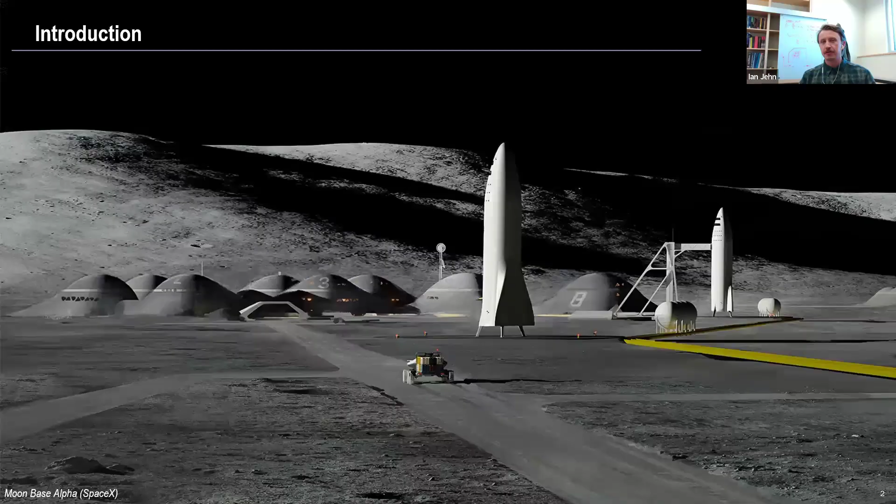Just a quick introduction onto what foundation engineering is, particularly lunar foundation engineering. These slides are going to be a summary of a publication that I put out last year in Acta Astronautica. I have that listed here with a link. Jared's going to share these slides if you guys are interested in reading this publication.

Lunar foundation engineering is a combination of 5 different things. There's some planetary science involved, understanding the geology of the environment, and then a lot of ISRU - how do we build landing pads utilizing resources that we find on the lunar surface, and the lunar surface itself as a resource to support the foundation. Then there's the traditional geotechnical and structural engineering of the foundation approach, engineering the regolith itself below the foundation and then engineering the actual foundation itself.

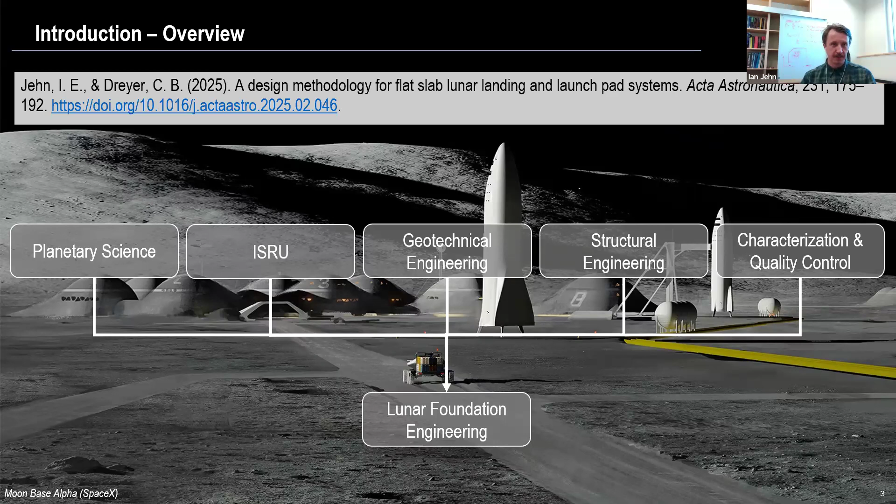And then obviously with all construction projects, there's an aspect of quality control and characterization, just making sure that things are constructed the way that we need them to be in order to perform the way we designed the design intent itself. So I'm going to quickly start off here just with a quick review of lunar regolith itself. I know there's probably a lot of people on this call that are pretty familiar with regolith, specifically lunar regolith, but it is something that requires an understanding so you can understand the behavior.

So the lunar regolith is the moon's surface, consisting of this soil-like dry fragmented granular material. This is what we call regolith. The difference between terrestrial soils and lunar regolith is the irregularly shaped particles.

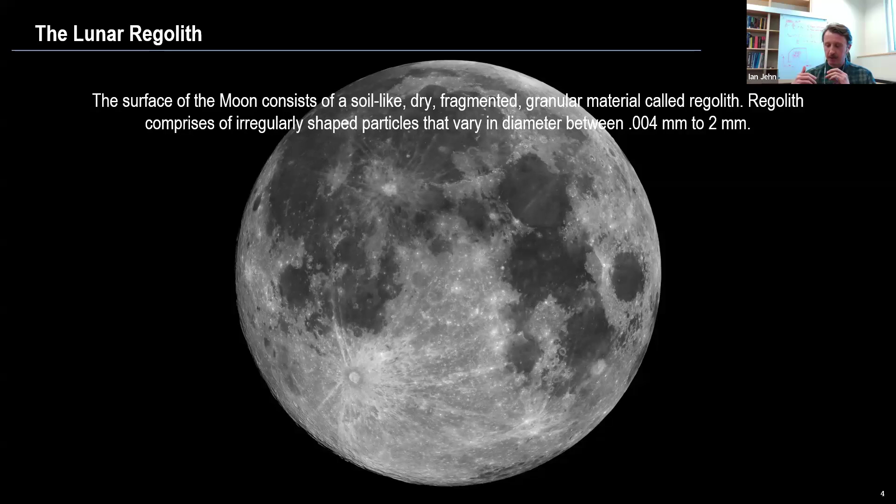The morphology is very different than what we see terrestrially. They also have some variations in diameter, but it does tend to fall within the well-graded sandy silt, the way that we see on Earth.

There's two main areas of the lunar surface that we have characterized different regoliths: the Mare regolith and the Highlands regolith. These basically boil down to both elevation differences and some mineralogical differences. The highland regolith is what I'm going to be focusing on. That's the white areas of the lunar surface. This is where all Artemis missions are currently planned to go, to highlands regions on the South Pole.

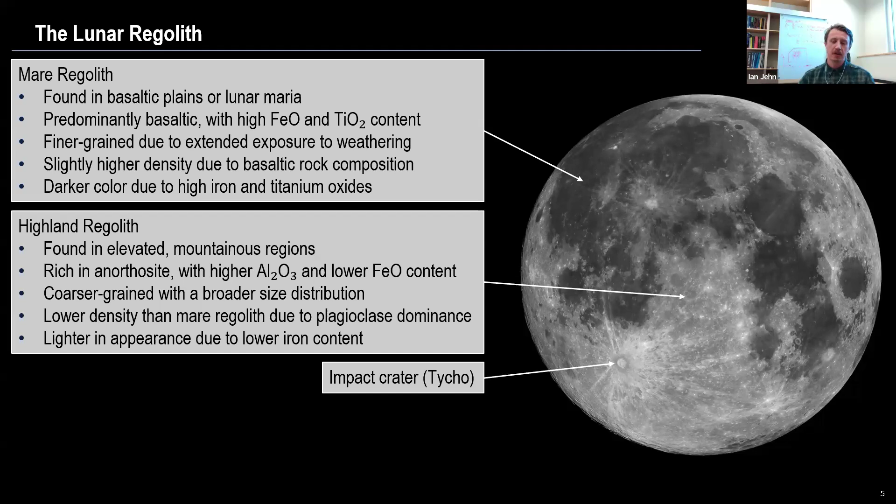But there is some differences between the two regolith classes, so I just wanted to note that. The big part of regolith and why it is so different from terrestrial soils is its formation process.

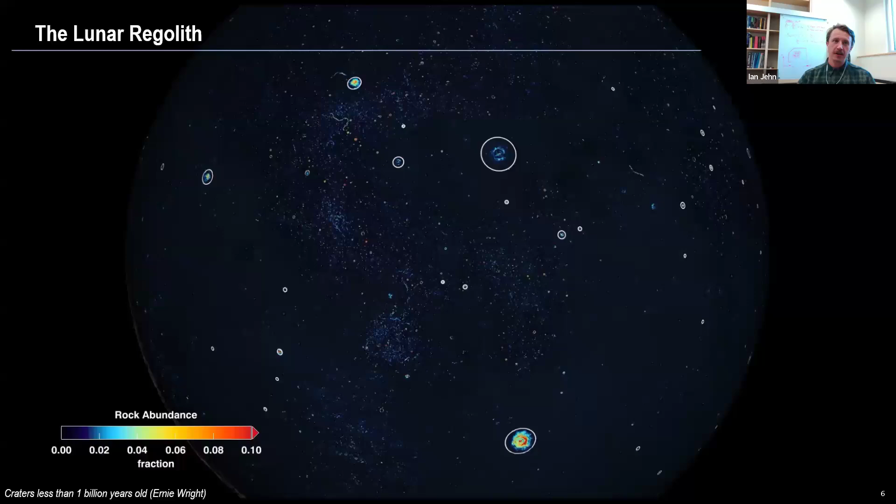This video is just indicating all of the craters on the lunar surface that are less than 1 billion years old, highlighting the level of impacting that occurs on the lunar surface and why this is important for regolith formation itself. The various meteoroids that are impacting the surface create this overturning and mixing process that we call impact gardening.

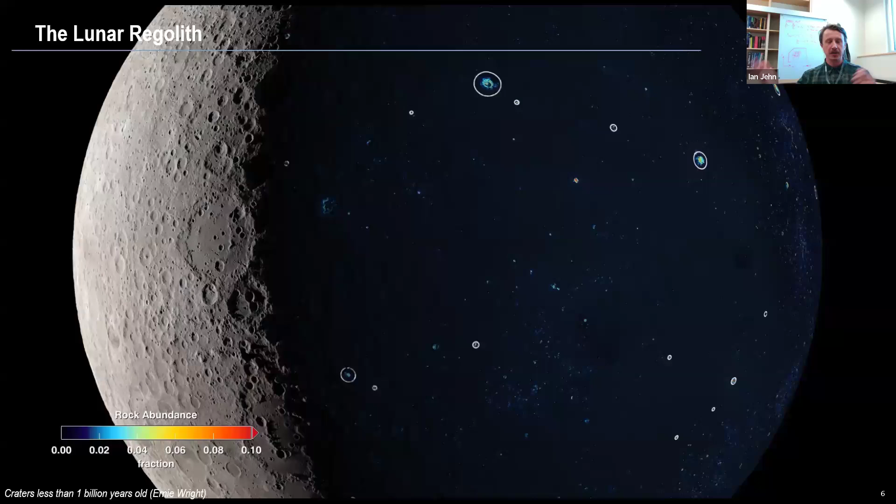And this is why the lunar surface has a little bit more homogeneity than we see from terrestrial soils. When these high velocity impactors hit the surface, they create these ejecta curtains that deposit regolith in the surrounding area of the crater, and this is where this turning comes in. So there's this constant reworking of this surface, and you get this really fine powder on the immediate surface of the moon. If we're going to build anything on that, we need to understand how that regolith is going to perform from a granular mechanics standpoint.

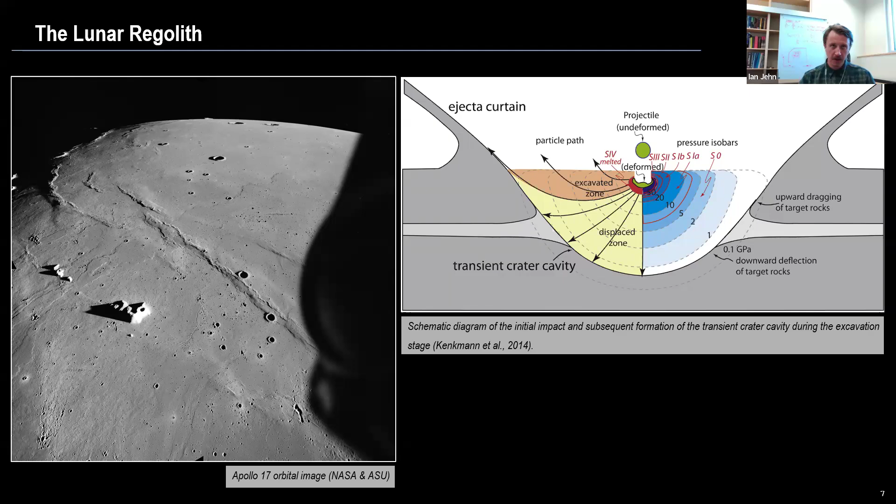This isn't the only mechanism for regolith formation. There's the meteoroid impacts and impact gardening, but there's also space weathering that occurs from exposure to solar and cosmic radiation, and that can alter some mechanical properties. There's also thermal fatigue, the fluctuations between day-night cycles on the lunar surface, which create stress gradients that can fracture particles. And then we have electrostatic charging, where fine regolith particles can acquire a charge and influence particle movement.

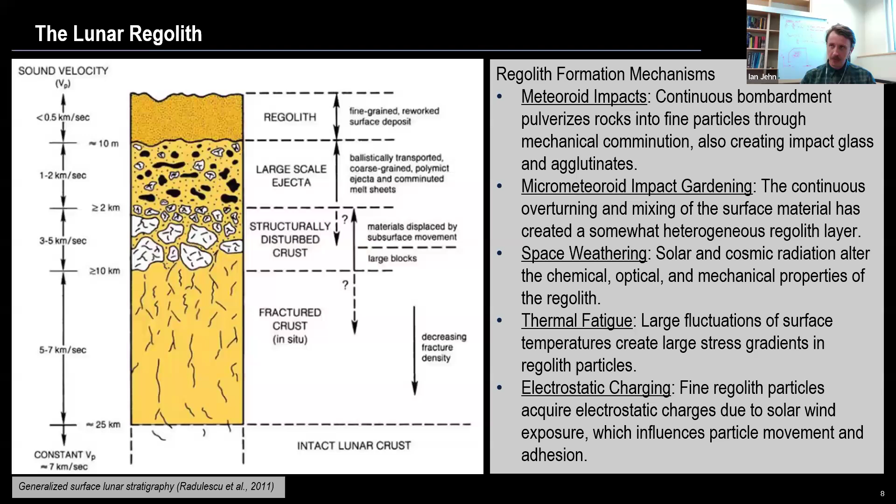Finally, I wanted to show some examples of what these regolith particles look like. Regolith comes in a bunch of different types, but there's just a lot of irregularity. There are some spherical particles - you can see that impact glass sphere. When an impact occurs, there's so much energy in that event that it actually melts some of that material, and as it's being transported across the surface, it turns into a sphere and is deposited that way. But most regolith particles tend to be irregularly shaped with sharp morphologies.

And then the immediate surface that's affected by electrostatic charging and radiation has these fairy castle structures, which are like the immediate surface of the regolith. You get these interesting matrix-type particles that have really small, fine things that can crush really easily.

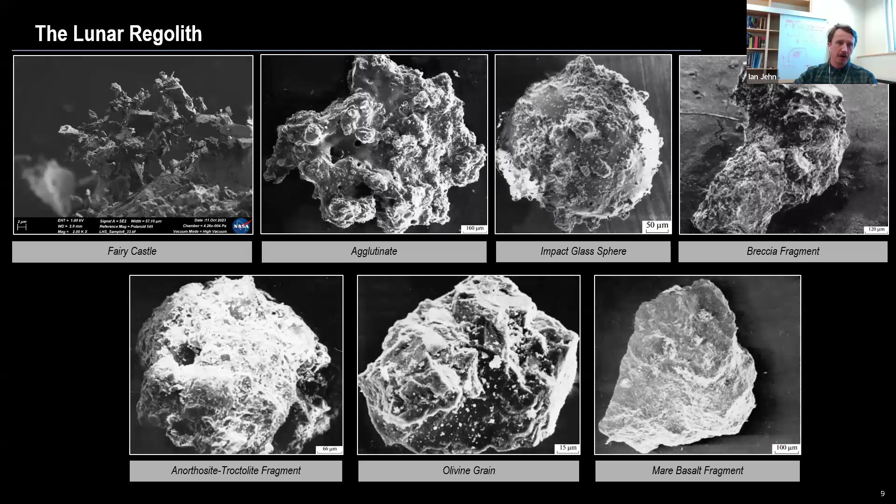So the next important part when it comes to regolith is understanding its density state and how density is related to particle packing and things like that. The top figure shows a difference between a poorly graded and well graded, or in geologic terms, a sorted and poorly sorted granular material. The lunar regolith tends to be well graded, which is the one shown in B here.

The particle size distribution is shown on this figure on the bottom left, which shows the range of particle sizes. This is from the lunar source book, plus or minus 1 standard deviation from Carrier, showing what the Apollo samples taken, specifically for the Highland regolith, look like from a particle size standpoint.

The last thing I wanted to mention on this slide was the in situ natural density profile that has been determined from various missions to the lunar surface. That's this figure on the right with the red dashed line. The big thing I wanted to mention is that the way the regolith forms and is deposited, you quickly get a density profile with high density packing of the regolith particles at a relatively shallow depth.

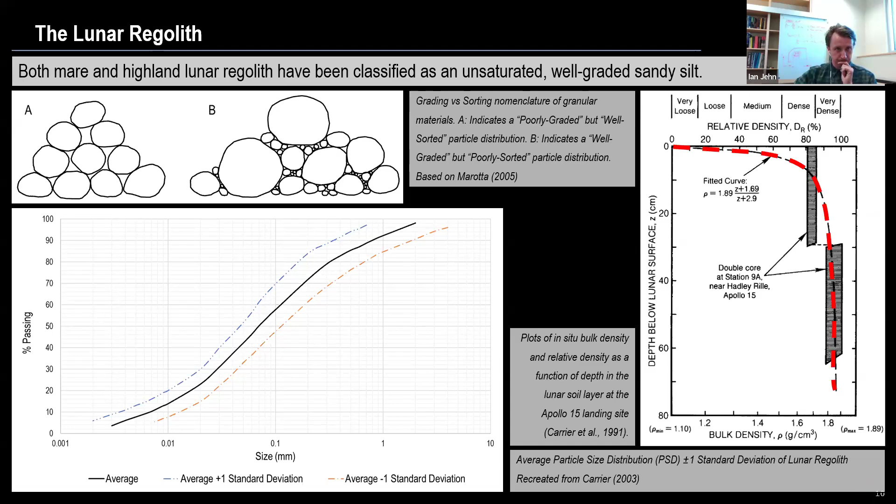To get into the foundation engineering philosophy, we need to talk about the Mohr-Coulomb failure relationship, which is basically a measure of strength, or how much the regolith can support. When it comes to granular material, this is a relationship of shear strength, the shearing of regolith particles against each other. The big part of the Mohr-Coulomb failure relationship is that if you have a denser granular material, you're going to have a stronger strength.

This should be pretty inherent in everyone's mind, but in practice a lot of people don't really see the relationship between density and strength. This is a direct correlation utilizing two major geotechnical parameters: cohesion of the soil and the internal friction angle. That's in this relationship here, where tau is the shear strength of the soil itself.

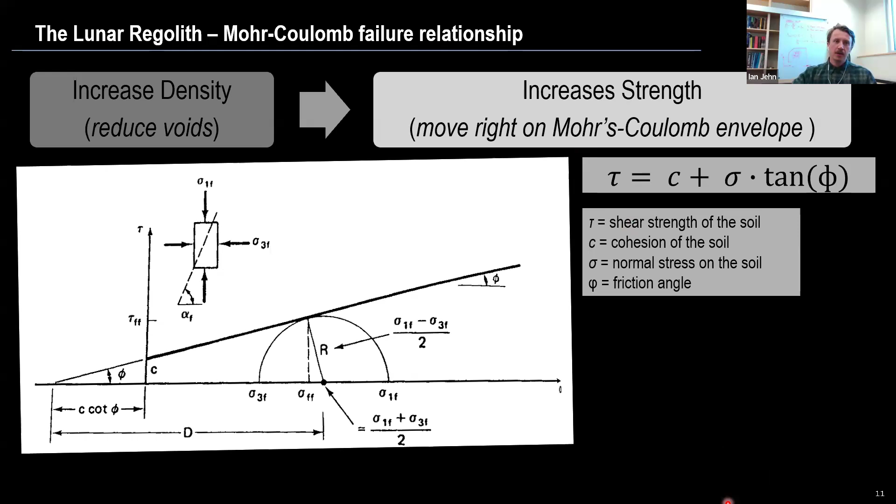This is the idealized version of the Mohr-Coulomb failure relationship, but if you were to take a bunch of triaxial tests to determine those geotechnical values, you'd actually see that the Mohr-Coulomb failure envelope is curved in nature. Basically, there's a relationship where you can only get so much strength with so much density. So the linear Mohr-Coulomb failure relationship is the typical model we use, but in practice you'll see this curvature and a change in internal friction angle with density.

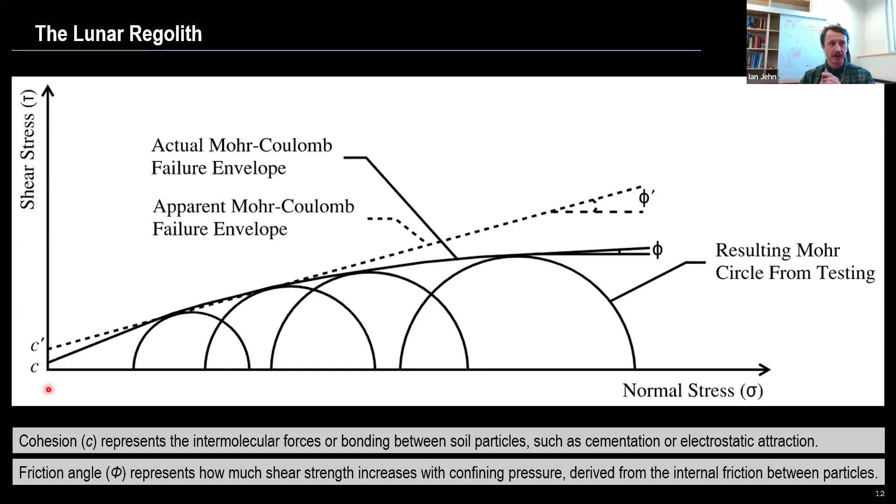The cohesion is just the intercept on the shear stress axis, and that will also be related to that actual curvature. A really good example of this, and Jared was actually a co-author on this publication showing that this density change correlates to shear strength, is this figure right here - the cohesion and shear strength of compacted lunar and Martian regolith simulants. The big thing is as you increase density on this axis, you get an increase in strength, and if you alter that normal stress at all, you'll get a bit of difference in that strength. But ultimately, higher density, higher shear strength.

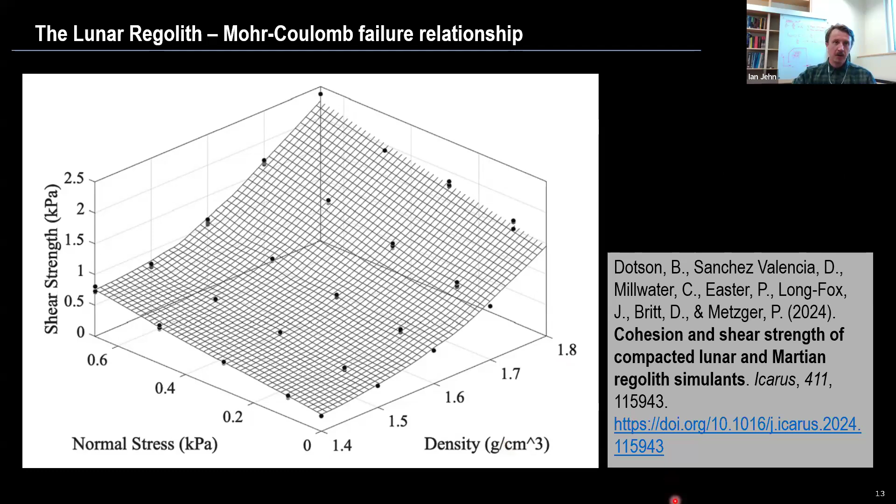Before we get into the foundation approach, I wanted to quickly summarize a few different geotechnical properties for both the Mare and Highland regions of the regolith. What I have here is a summary of these values from known science missions to the lunar surface, including the Apollo missions but also some of the newer missions that have gone to the Highlands regions. I've listed the minimum and maximum densities, and then the cohesion and friction angle.

I also wanted to include something called the compression index, which basically quantifies the deformability of a soil when it's subjected to an increased effective vertical stress. This is a measure of deformability, important for foundations, as you'll see in the next slide. Also, to further define cohesion and friction angle: cohesion is the intermolecular forces between the soil particles, and friction angle represents the actual shear friction interaction between the particles.

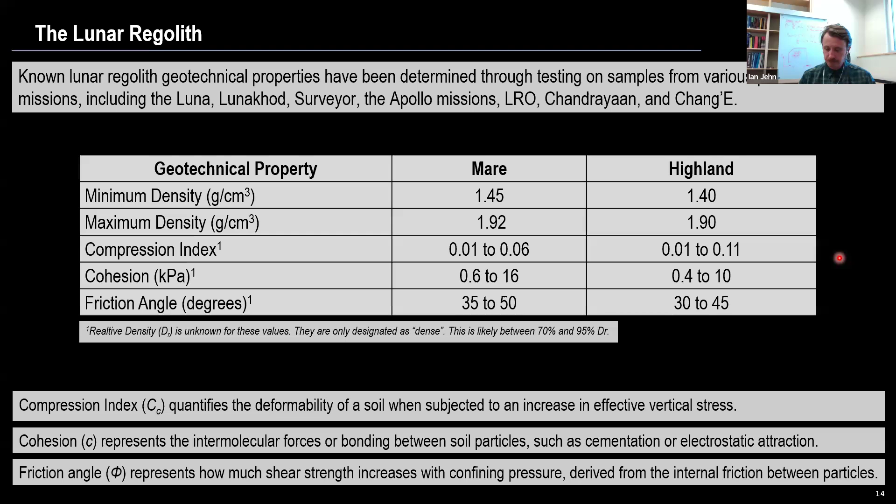Okay, now that we've covered the regolith, let's talk about foundations. Before we go further, I want to define what a foundation is. I don't know how many civils are on this call—I'm going to assume it's none, because that tends to be my experience in the space industry. I'm the only civil out here screaming about regolith and why it's important. So we're going to start with: what is a foundation?

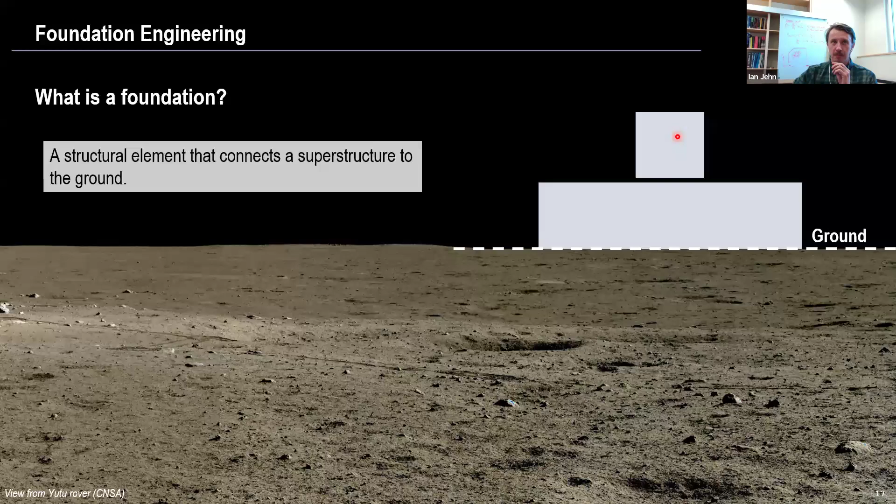The definition of a foundation is a structural element that connects a superstructure to the ground. I've drawn an idealized version of this: the superstructure is the top component, and this is the foundation itself. The purpose of a foundation is to distribute any loads applied to the superstructure over a larger area of the foundation, to reduce both the deformation and pressure resulting on the ground.

So if you have applied vertical and horizontal loads on the superstructure, that transfers down into the foundation, and you get a resulting ground pressure in this trapezoidal shape. Then we have this delta here, which is the actual deformation down into the surface. Depending on what system this foundation is supporting, you need to understand that deformation so your system can account for that vertical movement downward. And the resulting ground pressure relates to things like bearing capacity, which is completely related to the shear strength of the regolith itself.

There's one more component of foundations: preventing lateral movements of the superstructure. This can be done through overturning resistance or anchoring. Not something I'll talk about too much here, but lateral forces on the moon exist—seismic activity exists. I think we've already heard from Dr. Nirma Kaluk about this; she's my co-investigator on all our seismic work. So it's important to think about lateral forces, but for this example, we're only focusing on forces induced from a rocket landing on the surface.

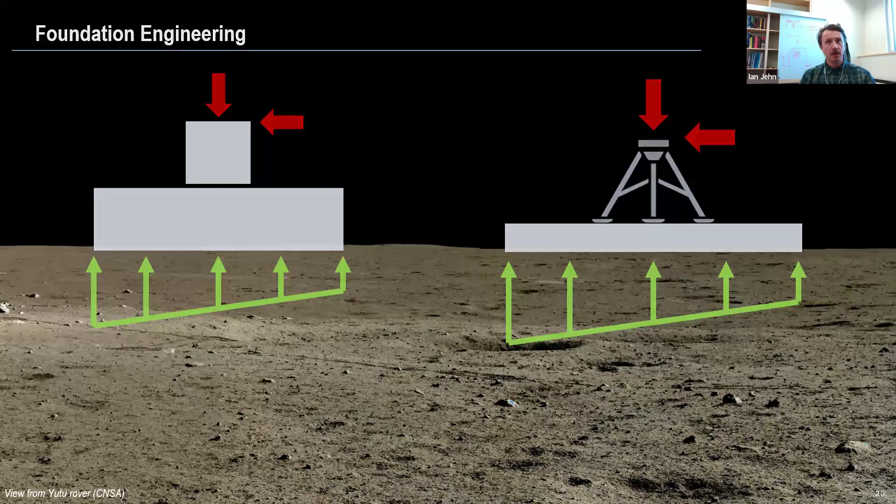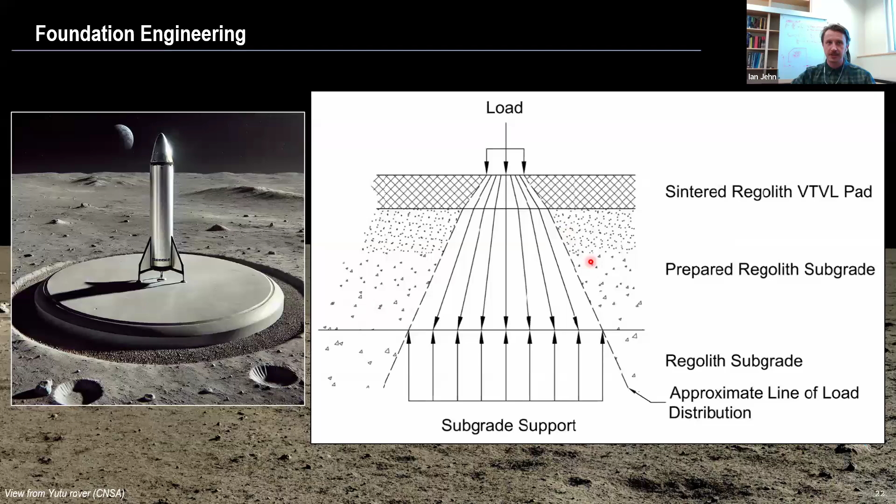Just to idealize what this means—actually I have two slides mixed up here, let me go to this next one first. If we idealize a landing pad foundation, we have a rocket sitting on a large flat concrete slab, or sintered regolith as I'm calling it in this figure. It's an engineered surface that transfers vertical loads through the surface, down into some prepared regolith subgrade. We'll talk about that preparation as part of the foundation engineering approach, which transfers all those forces down into the regolith subgrade below.

Going back to the slide I mixed up: if we model the flat slab of a lunar landing pad, we have a foundation here with an applied load, and we can model the subgrade below as a granular material with a stiffness. Stiffness is your applied force divided by the resulting displacement. You can model the regolith as a series of springs that compress as you apply load, and that compression is basically a rearrangement of the various particles.

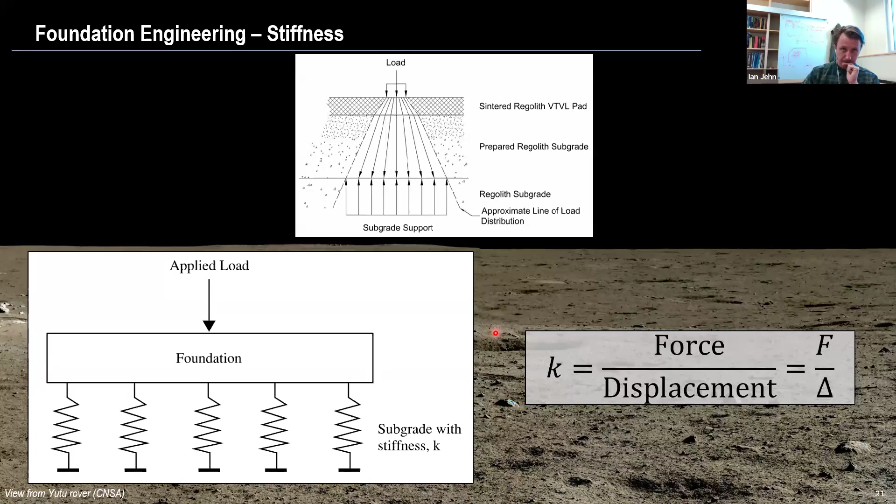Sorry for the mix-up on the slides, but let's start with the displacement component of this stiffness equation. When it comes to displacement of a granular material—in terrestrial geotechnical engineering we call this settlement—it's basically the rearrangement and densification of particles.

There are three main components of settlement that need to be incorporated for traditional foundation engineering. The first is shown in green: permanent deformation, or plastic deformation, particle crushing or distortion. Especially with that fairy castle structure on the immediate surface, this is the crushing of those particles and filling the voids created between them. This is plastic deformation, and agglutinates are actually a good component of this as well, since they can fracture these weaker particles.

The bigger component of settlement is shown in blue: consolidation settlement. This is the actual rearrangement and densification of particles. Utilizing traditional soil mechanics approaches, this can be modeled with an equation: the total change in void ratio caused by the applied load, divided by 1 plus the original void ratio. I'll show in a few slides how you quantify void ratio, but that's where the compressibility index comes in.

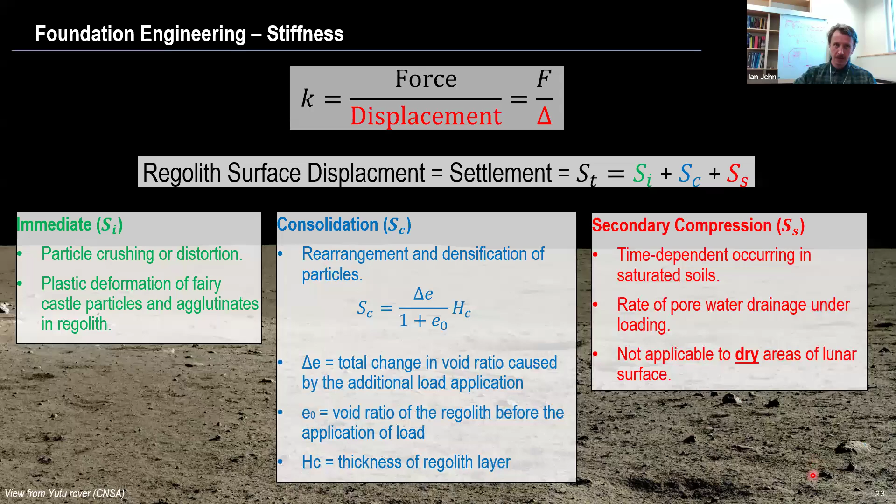Moving on to the force component of that stiffness equation: bearing capacity failure. This is generally listed as three different types of shear failure. The one listed in green is what we'd typically see in high density soils. When applying a vertical force down, you get failure wedges where the soil pushes outward and upward, creating bulges on each side of the vertical component. This is the type of failure we want to see in foundations—a high strength failure.

But if you get down into yellow, this is considered local shear failure, where you start having much more jagged failure on the load versus settlement plot. These tend to show yielding closer to the edges of the footing, and are often accompanied by quick jerking movements as you apply that load.

Finally, in red, we have low density failure, called punching shear failure. This is considerable vertical settlement that occurs immediately as you apply the load. This is what we see in the Apollo boot print photos—the Apollo lander foot pads as they touch down to the ground, with large deformations occurring very quickly because of that low density immediate surface.

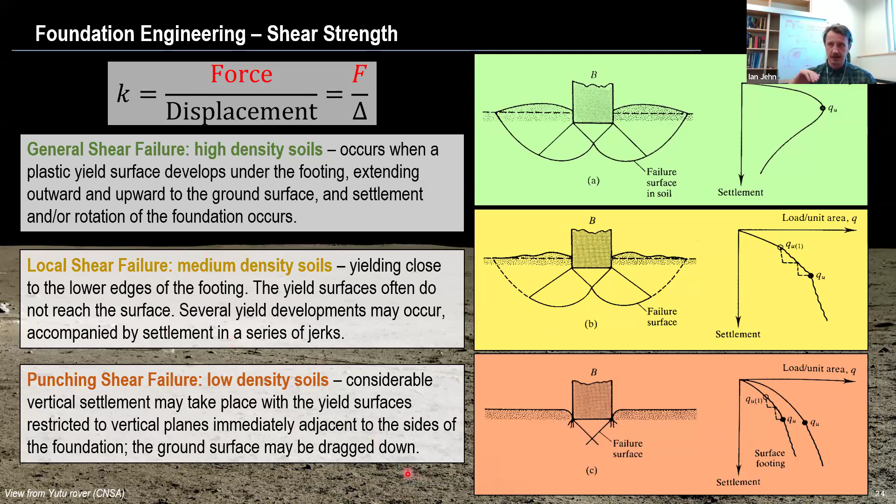This ultimately goes into ultimate bearing capacity. This is a bearing capacity plot people are probably familiar with from the Lunar Sourcebook. I'm not going to talk about bearing capacity much because settlement tends to be the bigger issue for lunar foundation engineering. The only reason I include it is that the bearing capacity of regolith is very high on the lunar surface because of that formation mechanism, giving very high density regolith at very shallow distances from the surface. We're not going to build anything that exceeds bearing capacity anytime soon, though it's something to consider eventually—once we get our first high rise on the South Pole, bearing capacity will matter a lot. But immediately we just need to focus on maintaining and mitigating surface settlement and deformation.

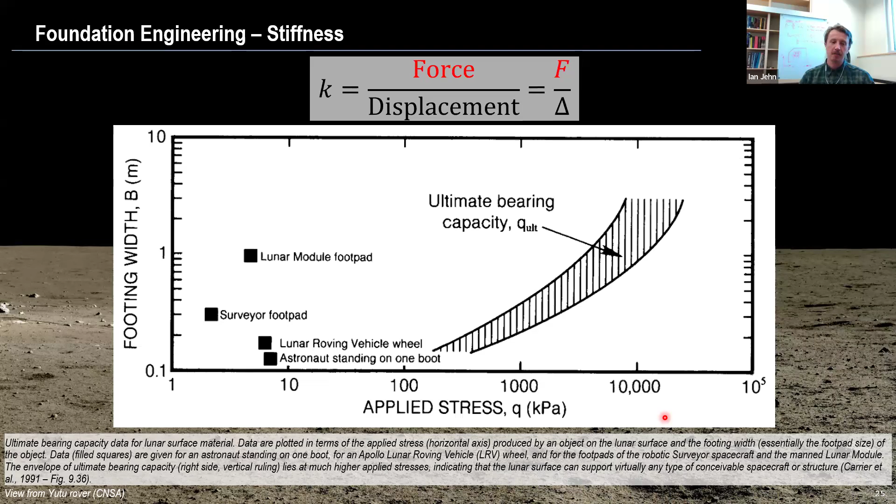To summarize the foundation engineering approach: if we design a lunar landing pad foundation on the South Pole of the Moon, we need to think about two things—reducing surface deformation and reducing the applied pressure on the surface. But applied pressure is not as much of a problem as reducing surface deformation. To reduce surface deformation, we can use two approaches. One is to densify the immediate surface to a higher density state, so we won't see rearrangement and consolidation of the regolith below when we apply the foundation and its loading.

Or we can simply excavate down to that natural high density subgrade, which was shown in that density plot. Getting down to 20 centimeters will get us considerably more dense regolith, requiring much less actual surface preparation before we construct the foundation on top of it. If we needed to reduce the applied pressure on the surface, you can do that by engineering your foundation a little bit better. This is either by reducing the applied loading, which can't necessarily occur all the time, but you can increase the loaded area onto that surface by increasing the foundation size, making it wider, thicker, things like that. So that would be the structural engineering approach to reducing that applied pressure.

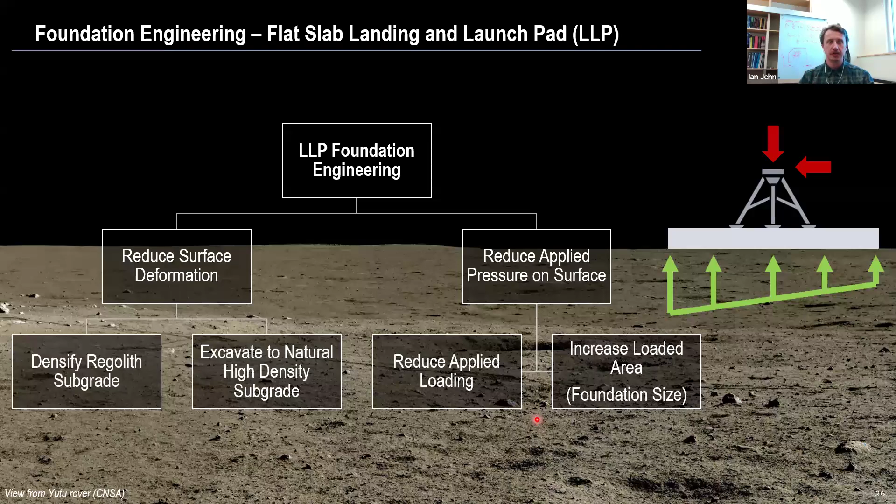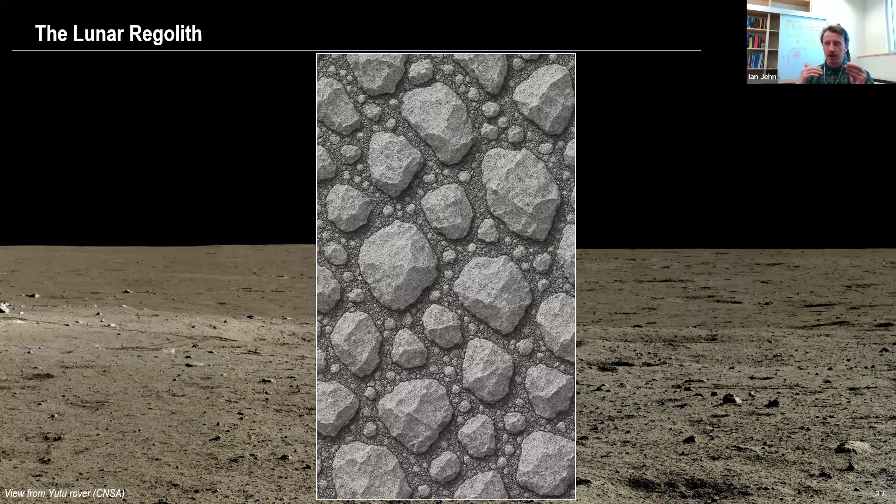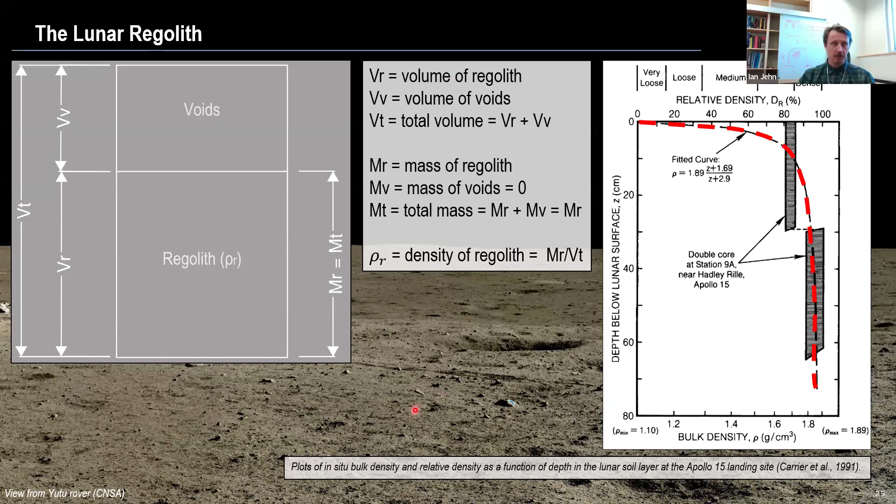So if we were to take a scoop of lunar regolith and look at it from a pure material standpoint, you can make something called a phase diagram. This is simply grouping all the solids and then all the voids. If you take a scoop of regolith, you can quantify how much actual solid mass is there and the voids between them, using this phase diagram. This is where you get the volume of voids to volume of solids, which is that void ratio I mentioned earlier. This is how you quantify the actual density state. The reason I'm bringing up phase diagrams is just to show you this single slide so you can see a visual representation of what this means.

You're going to see in this presentation that I'm going to tell you that's something we need to think about and not directly compare to the lunar surface, because lunar regolith does not behave the same way that a saturated soil on Earth supporting that same foundation would behave.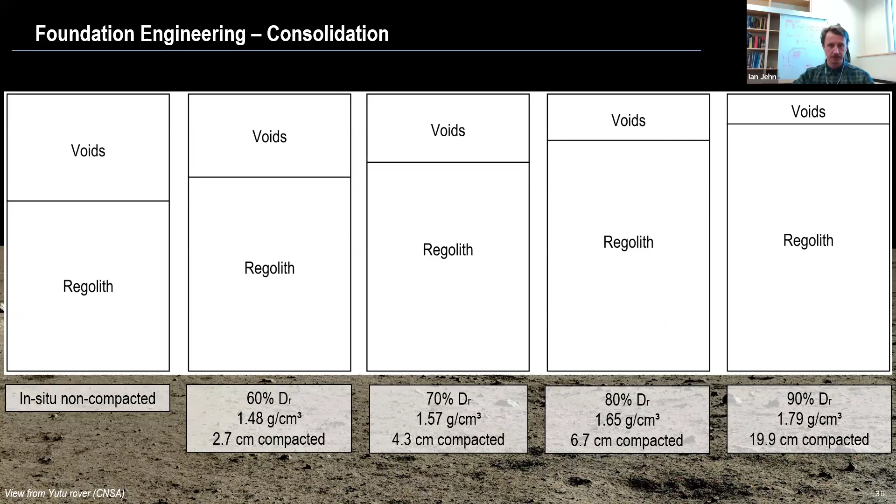So I think we're all familiar with how SpaceX has been doing things, landing vertically. This is how Artemis 3 is going to land, and all the preceding Artemis missions. But we have the plume environment created because the rocket nozzle is oriented at the bottom of this landing vehicle, and that high plume environment can create what is called plume surface interaction.

These are high velocity and high heat plumes interacting with that regolith, and that regolith is very low density, so you can create high velocity ejecta regolith particles that can reach ballistic trajectories and travel long distances in vacuum. This is obviously a very dusty and dangerous environment.

If you're landing anywhere near other mission assets, you're going to have these regolith ejecta, and it's going to be a big issue. So we want to mitigate this plume surface interaction utilizing a landing pad surface. This landing pad is going to create stability for the landing zone, and also create that load transfer down into the regolith surface to support the lander so that it lands perfectly vertical, with no overturning or tipping issues.

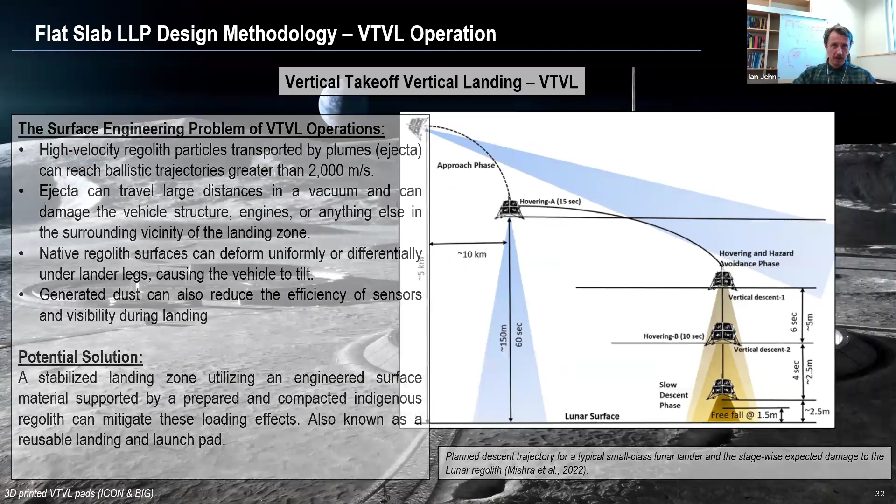We had a pretty good example of this regolith ejecta from Firefly last year, where you can see this huge dust environment occurring, and you can actually see there was a pretty good size regolith rock that was ejected out as it landed, but you get this pretty intense dusty environment.

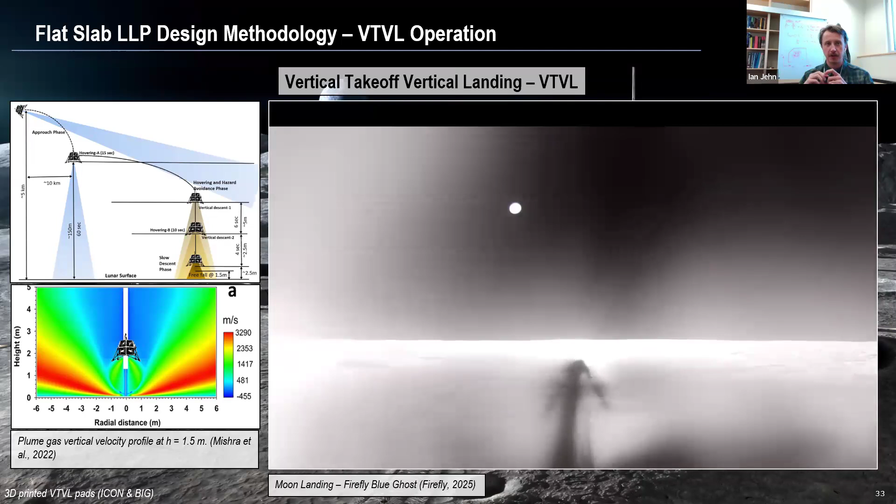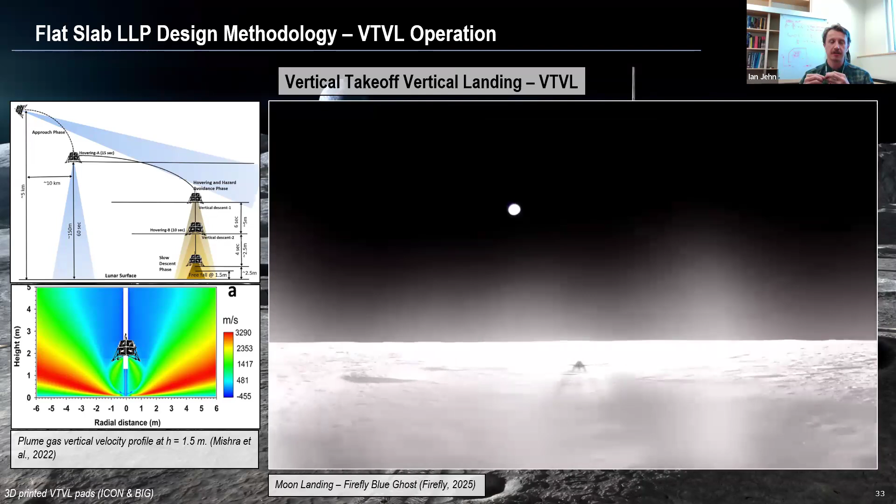This is a very lightweight lander compared to what we're talking about with HLS vehicles. So it's something we really need to consider for HLS, because interacting with the surface at much higher velocity, higher pressure, and higher heat flux from these HLS landers is going to make this problem exceedingly worse.

We have pretty good examples from SpaceX, this is the Falcon Heavy boosters landing on a concrete landing pad terrestrially. You can see the amount of debris occurring. This is from Everyday Astronaut's film, they had a camera set up during that landing back in 2018. You have a lot of debris blowing around, and when you don't have an actual atmosphere to interact with, this is going to create the same problem.

The big thing when it comes to the plume environment is how much pressure and heat flux is generated. This figure on the top right is a CFD model showing a rocket nozzle and the resulting pressure out of that nozzle, and the interaction at the horizontal surface below, for an 11-ton lander and a 40-ton lander. You can see the large increase in the pressure topography here.

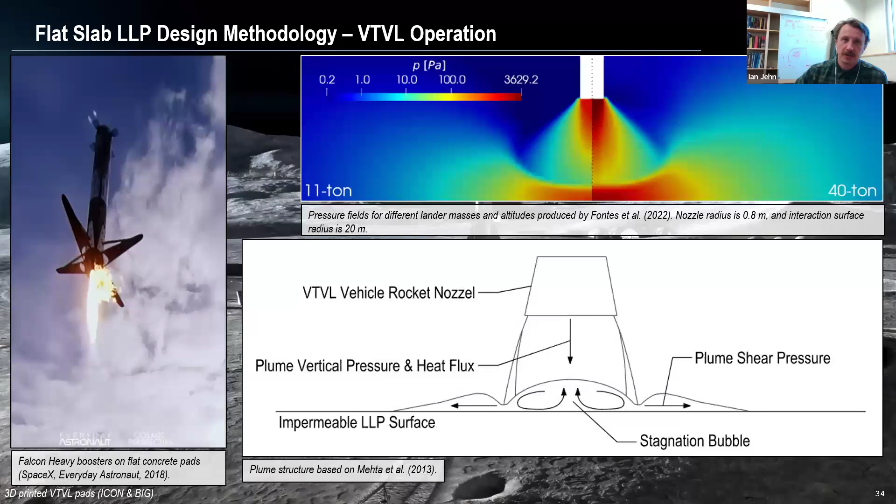This concentrated pressure occurs because of something called the stagnation bubble. When you have this vertical rocket nozzle blowing pressure and heat flux down, you can create these almost eddying type effects where you have a concentration of pressure and heat flux, plus the component of vertical pressure and plume shear pressure on each side.

In the publication I mentioned at the beginning, which is where most of this work comes from, I go through the process of simplifying these loading values, specifically pressure and heat flux from a chemical rocket propulsion system. The reason I'm doing this is because every rocket manufacturer does not want to share data from their rocket or rocket nozzle itself, it's an extremely proprietary area, so they don't want to share estimated pressures or heat flux.

So I proposed this very simplified estimate, and I want to reinforce that I'm not claiming these values are exactly one-to-one. There's so much variability in this. These are only used for approximations, so that we can design a landing pad.

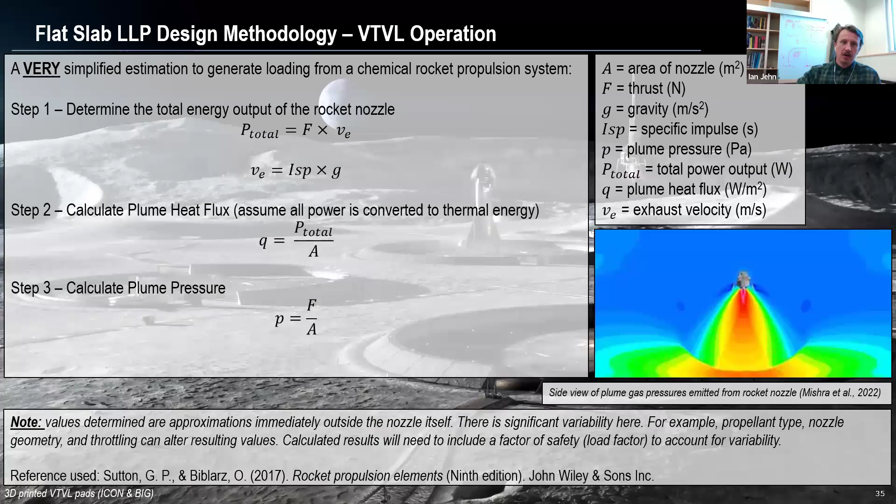To simplify this into 3 simple steps, and if you're curious how I did this, please refer to my publication: you determine the total energy output from the rocket nozzle, and from that you calculate the plume heat flux and plume pressure immediately outside that nozzle. Then, due to that stagnation bubble, the order of magnitude of that pressure and heat flux immediately outside the nozzle tends to be the same at the maximum point that the nozzle is interacting with the horizontal surface. From there, I'm utilizing something called a bullseye landing loading geometry.

So I propose this bullseye loading to basically simplify that loading and make sure we're accounting for any type of variability. The maximum plume pressure and heat flux is in the center, and then that dissipates as you move outwards from the centroid of the plume itself.

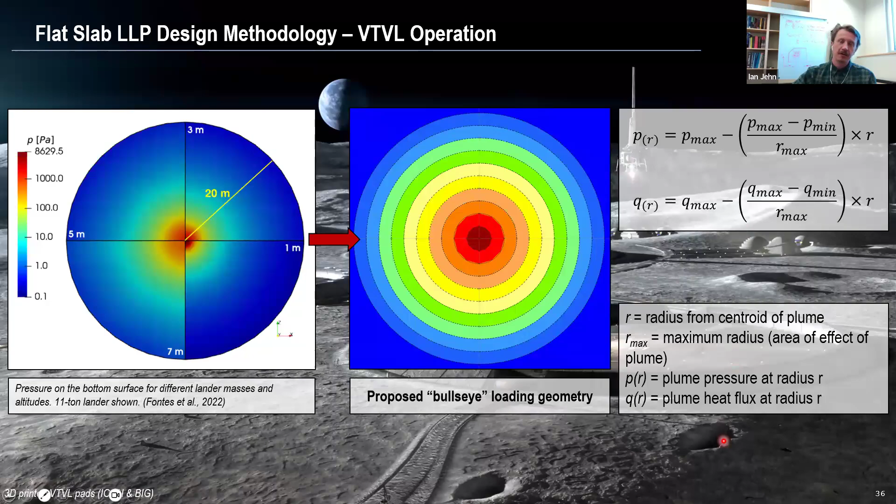Again, a few ways of quantifying that here, more in the publication if you care to learn about it. But the bigger thing here is estimating the maximum plume pressure and heat flux for our landing pad design utilizing different vehicle classes, based on vehicle mass and the resulting rocket engines used for each of these masses.

These values are, for anyone familiar with the American Society of Civil Engineers, part of a lunar construction guidelines document we're putting together. We'll be talking about it more at this year's Earth and Space conference in April. These estimated plume pressures and heat flux values will be a chapter in that document so the industry can utilize an approximated approach for landing pad design.

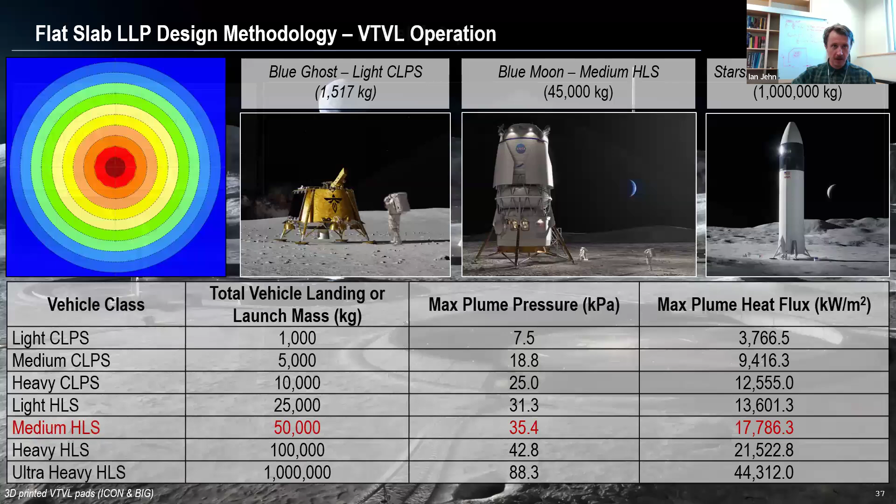So in order to design the landing pad itself, I utilized a finite element analysis here, kind of a traditional structural engineering approach, just as an example in this publication. I'm utilizing the 50,000 kilogram HLS lander, which I listed as a medium HLS.

We're assuming a monolithic sintered regolith pad of about 40 meters in diameter. This gray element is the actual landing pad itself, and that is supported on about 3 meters of compacted regolith subgrade, which is regolith compacted and densified past that in situ state.

I specifically picked 3 density states that I'll show here in a minute. What I have shown here is 90% relative density, but I'll go into that in a second. I just wanted to show my meshing approach, how I modeled the 2 different elements, the regolith in green and the pad in gray.

You can see there's a concentration of mesh in the center there, which is to account for that high plume surface interaction with that pressure and heat flux, making sure the model is distributing those stresses correctly.

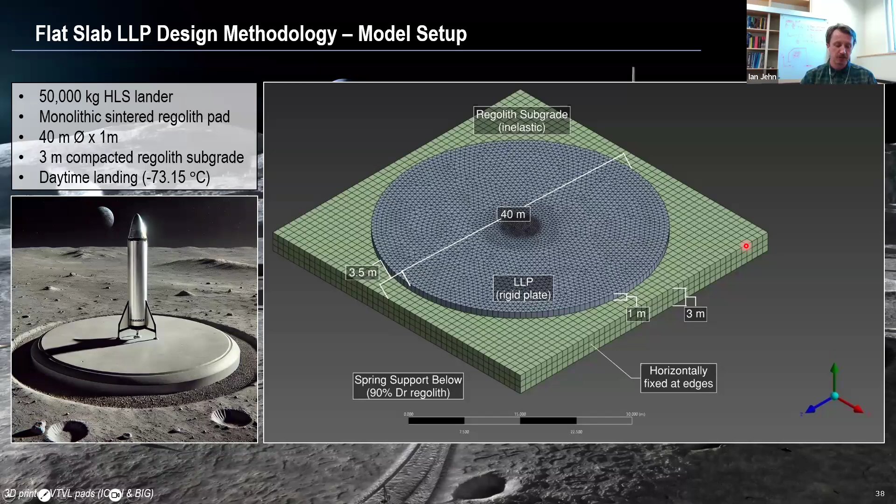So we have the lander coming down. What I'm presenting here is just the landing event. The launch event will obviously have different environments, since the rocket nozzle is actually going to be closer to the surface with that interaction.

The bigger reason I'm showing landing here is because it's typical in vertical takeoff, vertical landing operations that as that lander comes down, there's an engine cutoff at some point, and then that lander free falls the rest of the way and impacts the surface.

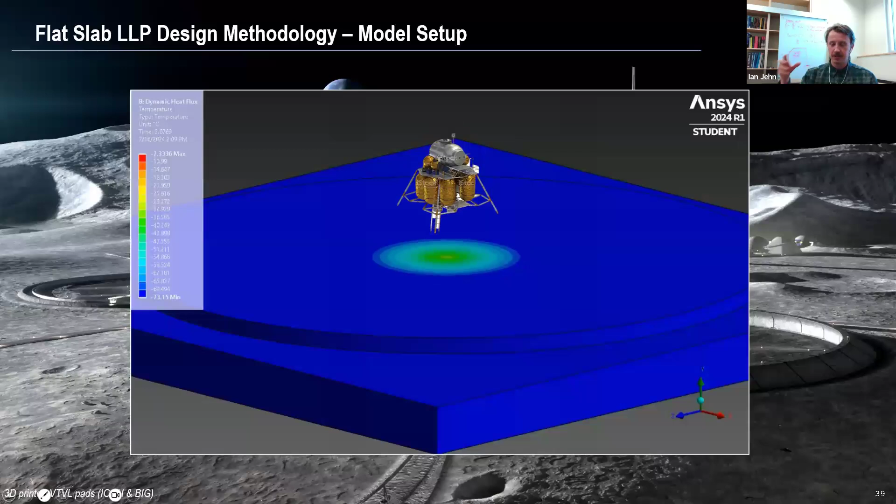So I wanted to account for the impacting event of everything centered on one leg, so that we can see what that does from a structural engineering standpoint of the landing pad itself.

So we're going to go into the loading conditions real quick. I generated this based on my bullseye approach - a loading point plot that I used for both the plume pressure on the left here and heat flux on the right, just showing that distribution from the center.

That was then imported into ANSYS to create the actual loading geometry. You can see the maximum values I used here for both pressure and heat flux.

I utilized a time step approach where I assumed the landing event occurred over 4 seconds. As you can see, for example on the vertical pressure, the pressure increases up to that maximum pressure at 4 seconds, and then we have an engine cutoff at 5 seconds.

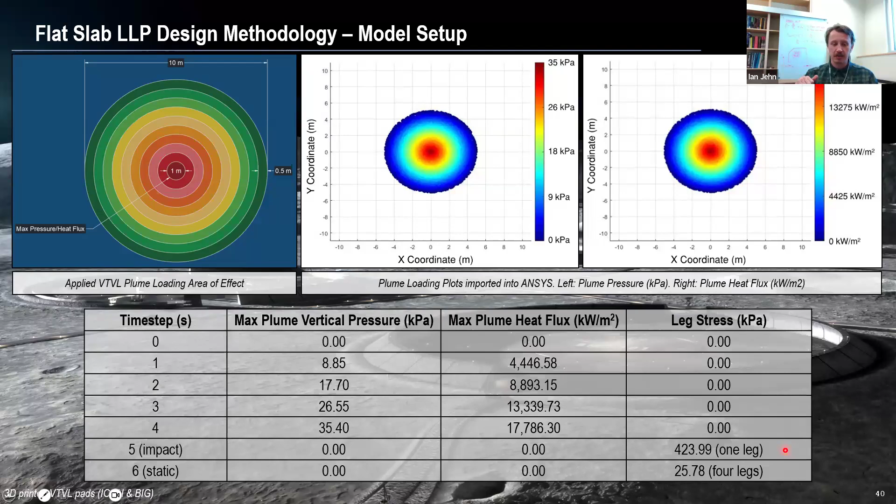So I'm assuming the impacting event from one leg occurs at 5 seconds, and that's where you get this 423 kilopascals of one leg hitting that surface. After that impact occurs, we have the lander statically bearing on that surface.

The identified failure modes listed in that publication, I'll quickly review here. When it comes to the landing pad itself, we need to consider three main structural failure modes: axial, shear, and bending failure. Axial failure is physical crushing of the pad. Shear failure would be an actual punching failure of the lander leg hitting the surface, punching out this trapezoidal wedge. Then there's bending failure, where you have compression and tension couples in a flat slab, so you get bending in the slab.

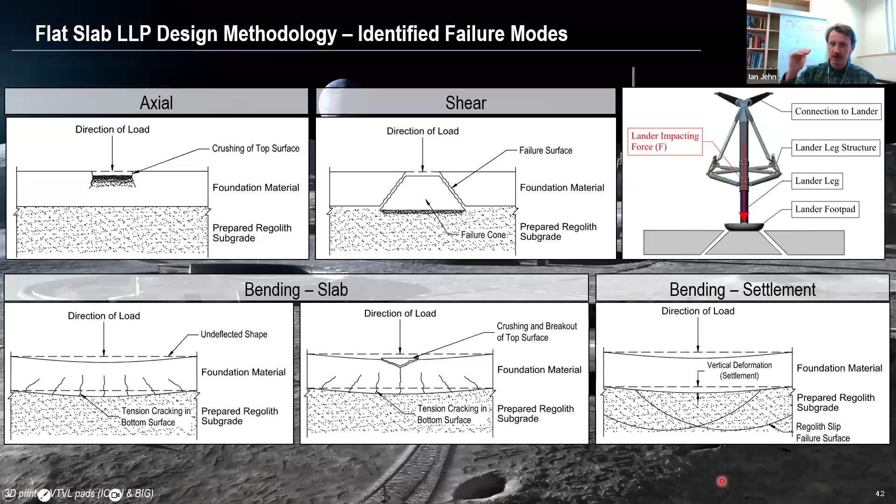So if you have more deformation of the subgrade below, you're going to have more bending of the pad.

There are also some surface failures we need to consider. This is more of a serviceability or maintenance thing for landing pads. The Morpheus lander showed some pretty good examples of this - you can have cracking or chipping of the top surface, or because of the high temperature environment from heat flux, you can get delamination and eventually spallation of the immediate surface where you have large stress differentials, and then surface erosion or ablation from that spallation.

So that's just actually removing this material, and this was from the Morpheus landing. After 10 landing attempts, you can see that the concrete spalled and eroded off pretty good. And these circles are actually chipping marks from the lander legs itself.

If you do end up getting plume pressure down through cracks in the pad, you can get a pressure buildup and actual excavation of the surface. That's just a failure mode to consider. I assume a purely monolithic pad in my example, but it's something to make sure we consider when it comes to landing pad design.

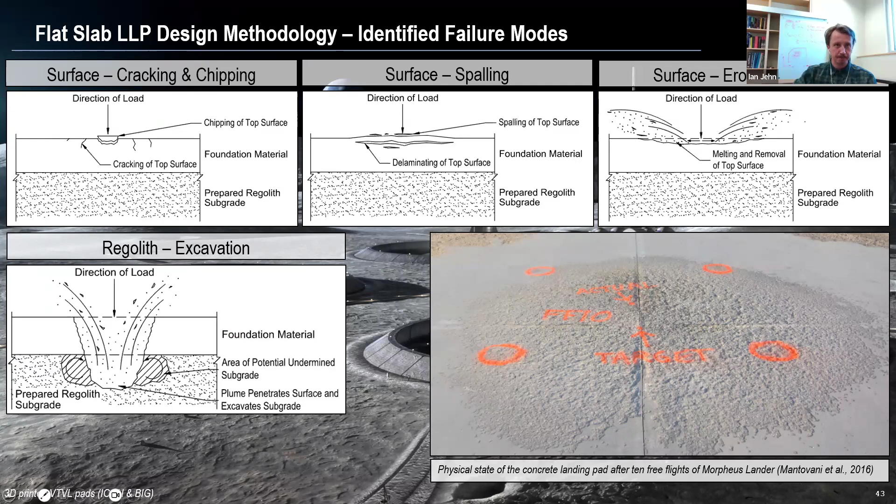Okay, let's quickly get into this, I've got about 5 minutes left. I've separated the plume pressure and the heat flux into two different loading events, and then we're going to combine them into an envelope at the end.

These are just exaggerated deformations. The important thing is if we're just looking at plume pressure interacting with this horizontal surface, you're getting a downward deformation of that pad material into the regolith surface. But if we're looking at just heat flux, we're increasing temperature, and that pad material expands upwards and outwards. So the deformation from a structural analysis standpoint is you're fighting between plume pressure pushing down and temperature pushing up, and you'll see at the end our overall deformation is decreased because of that.

Quickly reviewing the resulting surface temperature from this landing event, you can see in the section view how much the temperature changed. I did fail to mention this was a 1 meter thick pad - I realize that's very thick, I'll talk about that at the end. You can see it transfers a good amount of heat, or temperature change, down into that 1 meter thickness. So the thinner your pad is, the more temperature change you'll see.

But ultimately, we saw a temperature change of about 27 degrees Celsius through this landing event.

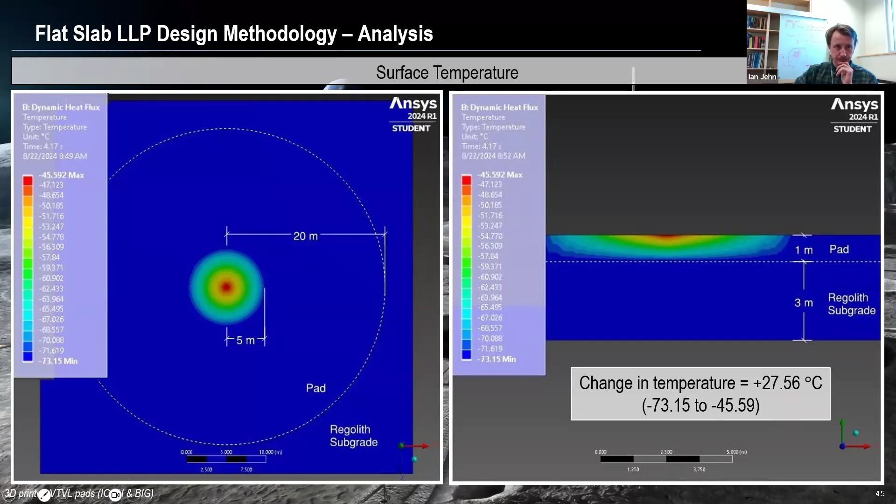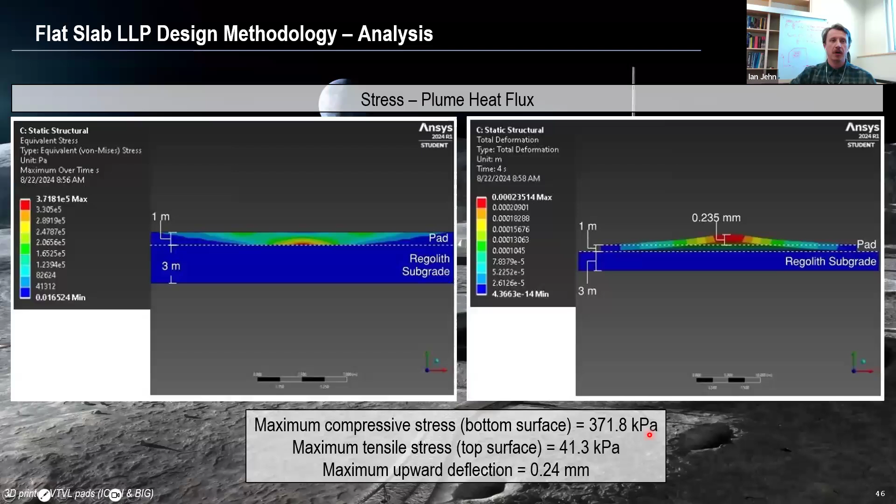The heat flux itself created some compressive and tensile stresses, and then a maximum upward deflection. The compressive stress was about 371 kilopascals, and the tensile stresses on the top surface were about 41 kilopascals. We saw an upward deflection of about 0.24 millimeters.

If we're looking at the plume pressure, we have the opposite: compressive stresses on the top of 365 kilopascals, tensile stresses on the bottom surface of 395 kilopascals, and then a downward deflection of 1.19 millimeters.

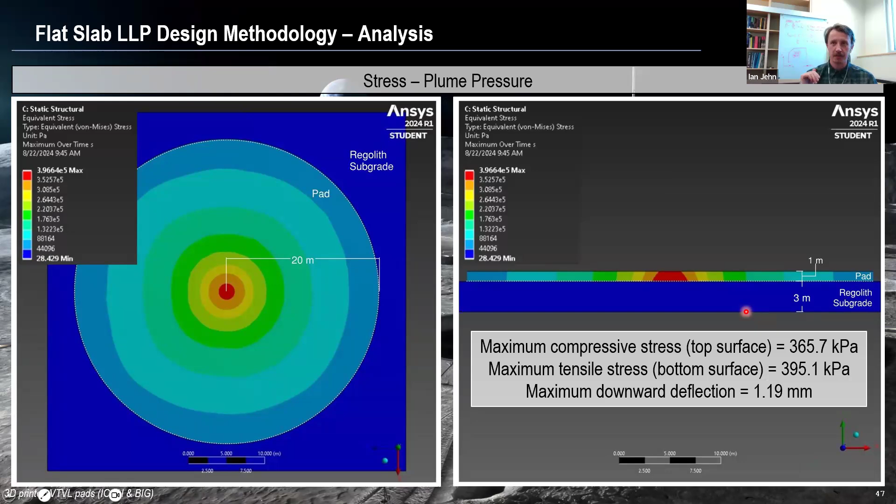I'm sorry, I'm going pretty fast through these last ones. If you are curious about these, please look at my publication, the figures are much larger and easier to see. Anyway, back to this - there are two more loading events.

There's that single leg impact, and I have the deformation shown in section here. This was just a single leg load. We had a compression and tension couple of about 5.35 kilopascals, much lower than we saw from the plume event. But we did get a 0.22 millimeter downward deflection, and that's an eccentric deflection - you can see the actual rotation of the pad occurring and the resulting regolith below.

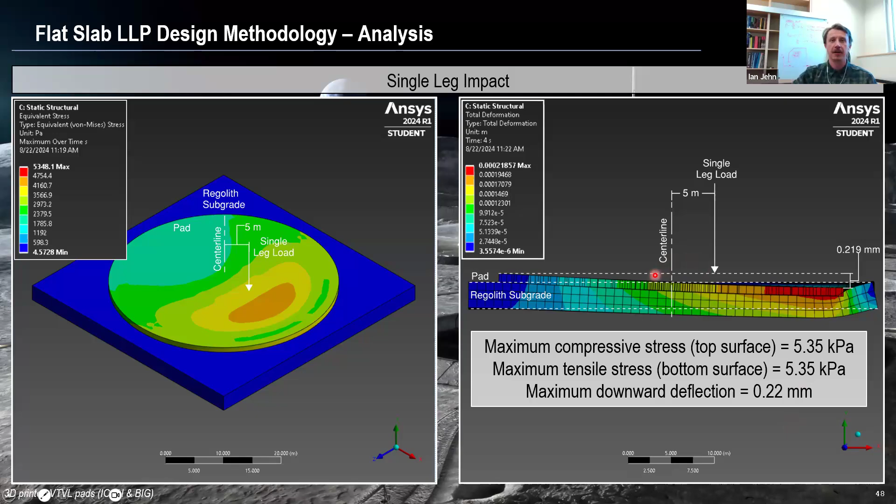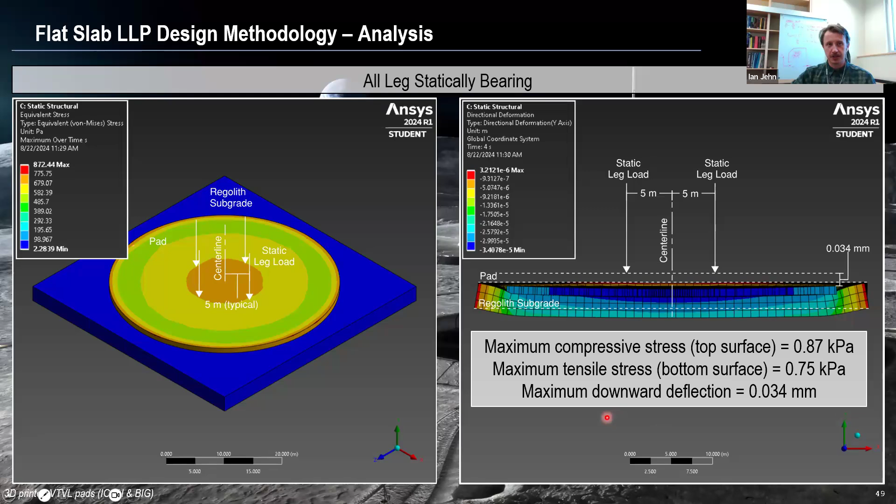And then, when we're statically bearing, we have a uniform deflection, with much less overall compressive and tensile stresses. So really the governing loading case is the plume event itself, and we obviously see much more sustained downward deflection in the pad.

So if we were to envelope all these into one, we got a maximum compressive stress of 365, maximum tensile stress on the bottom surface of 395, and then a maximum downward deflection of about 1 millimeter from the plume and 0.22 millimeters from the leg impact.

Again, this is a 1 meter thick pad, and the compressive and tensile stresses were not exceeded based on the assumed material properties of the pad itself. So we don't have any cracking.

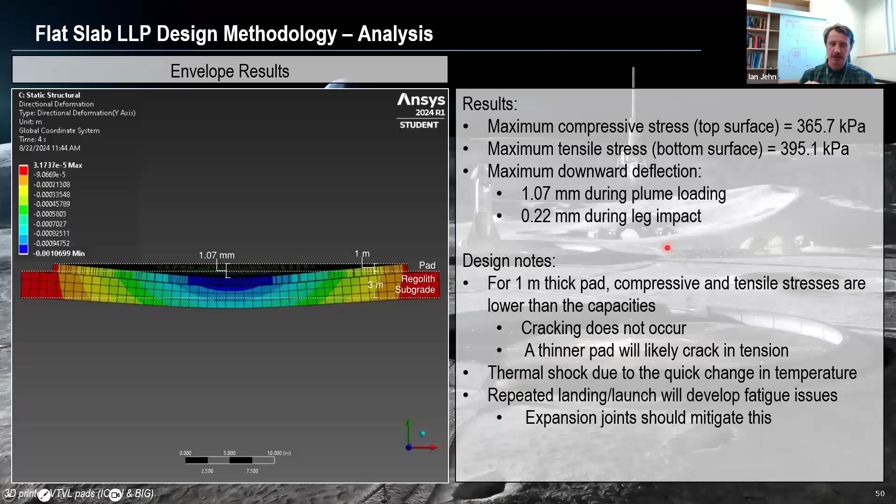If you were to decrease the thickness of the pad, you're absolutely going to start seeing cracking in tension. And then there's also going to be some thermal shock that would need to be accounted for because of that thinner pad. Obviously repeated launch and landing events will develop those fatigue issues that I was mentioning, shown in that Morpheus lander figure. So expansion joints could probably mitigate this. This was a monolithic pad, so it's not something we need to really talk about right now.

Last thing I wanted to mention here was our various compaction states - this is the last slide. I wanted to show how much settlement occurred between the 70, 80, and 90% relative density states. I have the actual sections shown here, but they're difficult to see the difference, so I have them listed in the table.

You can see the difference between 70% relative density and 90% relative density in settlement is 0.05 millimeters. When we're thinking about preparing the surface, 0.05 millimeters in settlement can easily be handled by the foundation design itself. But that is a considerable amount of energy input into the preparation of that pad surface - again, we're looking at 4.3 centimeters versus 19.9 centimeters.

So do we need to have 90% relative density supporting our landing pad? In my opinion, absolutely not. It's a waste of energy and a waste of money sending up a rover to prepare that surface. This really needs to be talked about in the community - this 90% relative density rule that we use terrestrially is not apples to apples for the lunar surface, and we can likely handle most of that settlement just by engineering our foundation systems a little smarter. With this, it's really 0.05 millimeters is nothing.

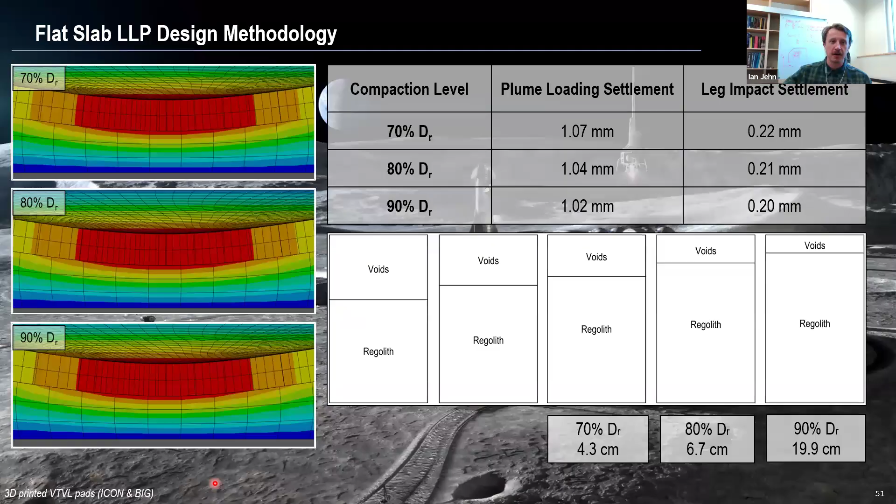So that was my big soapbox climax here. I will end it here and open up for questions. I have a QR code if you need to contact me, that can get you my email address and anything like that. But besides that, I welcome any questions.

Awesome talk, Ian. I personally have several questions, but we have more in the chat. Okay, we'll address those first.

Nithyoga Goswami says, 'You are not alone. I am a geotechnical engineer from Langan Engineering. I am so happy that you have brought foundation design principles to the space industry, folks.'

Does electrostatic charge affect the Mohr-Coulomb strength criteria, and if so, how does it affect the strength of lunar regolith? There is some talk right now about how we want to quantify cohesion and the electrostatic charging or spacing as part of interparticle bonding. Do we need to include electrostatic charging in cohesion? I personally think we should use cohesion as an overall envelope for anything that's interparticle connecting, but that's a larger question occurring in the industry.

For what it's worth, I do agree. I've seen papers recently investigating the effects of electrostatic contributions to bulk regolith strength. It's there—it's not going to double your strength or anything, but it's not something to be neglected. It's also something that changes with the day-night cycles, so it's something we do need to account for. But in the worst case, when designing a foundation, you'd want to assume those connections aren't there so you have less shear strength from it.